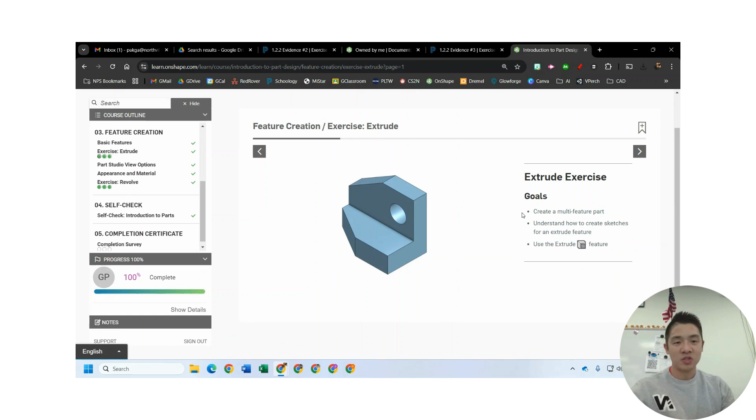All right class, we are now in exercise number 3, exercise submission extrude. We're going to do some extruding today, which is essentially adding a third dimension to a sketch. Here's the instructions, I'll walk you through it and get you going. We're going to create this part right here, starting with a couple sketches. Let's go and get going.

Go to cad.onshape.com, you can type it in. If you haven't bookmarked it, I'd highly recommend a bookmark. We'll create a new document. This is the extrude exercise, and for me I'll keep track that this is my video tutorial version. Hit create, take you back over here.

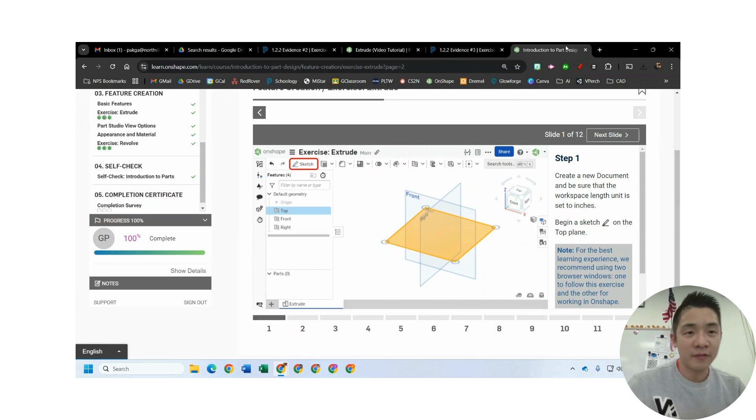First thing, I'm going to have those instructions up as we go. We're going to create a new document, make sure workspace unit is inches. Again, you can double check that in the 3 bars, come over to workspace units, and inches is good.

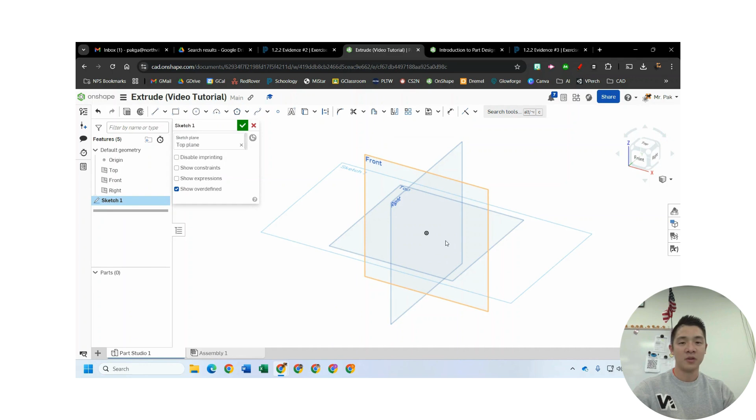Next up, we are sketching on the top plane. Come over here, hit sketch. You can choose it from this list over here on the side, or choose it straight from the main view. I would look at it normal to the view, meaning straight on. You can click on the view cube up here or hit the letter N. I chose the letter N.

Next up, and we got 12 steps here total: coincident to the origin, so we're going to start a corner rectangle, making sure that it starts on the origin and goes to the bottom to the left. Corner rectangle up that way, click here, drag it down. Looking good.

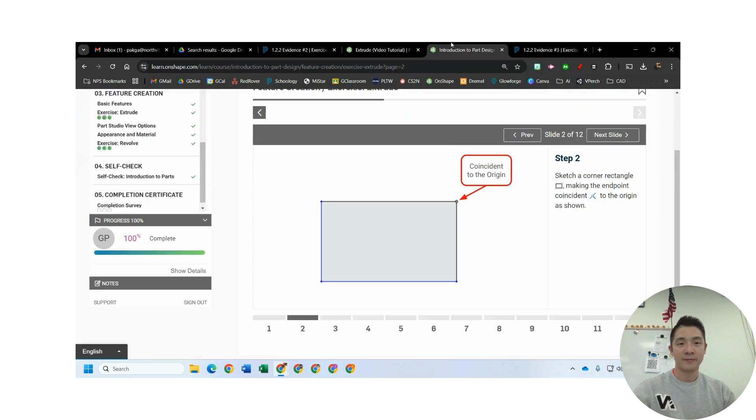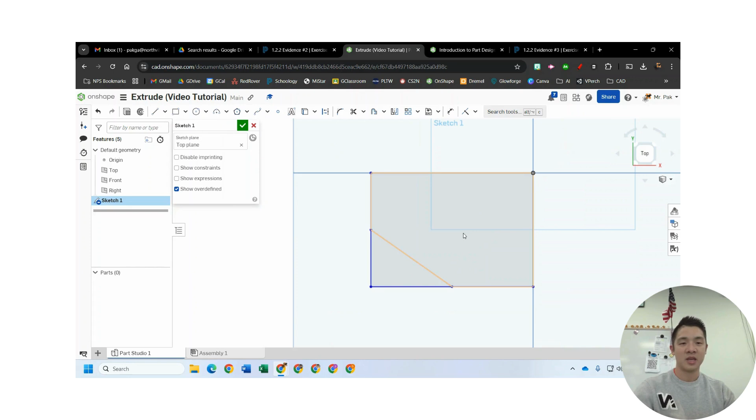All right, next up we're going to sketch a line. Want to make sure the midpoints are shown there. Come over this way, hit line or the letter L. Notice as I hover over a line, if I go towards the middle, it'll give me a little box, that means it's the midpoint. I click, do the same thing over here, find the middle—oh there it goes. Click and hit escape to end the tool. Now I've got those locked in.

Step 4, add some dimensions. It's 5 by 3. I'll go ahead and hit the letter D for dimension. This side's going to be 5 inches, I type 5 and enter. This side's going to be 3, enter. Everything's black, it's constrained—that's what I want it to look like.

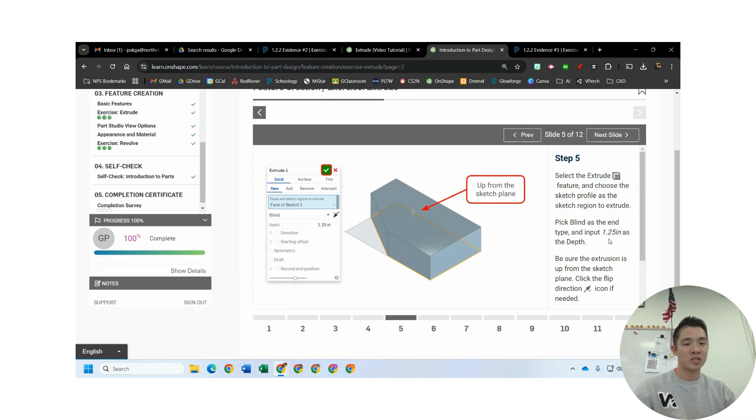Let's keep it going. Step 5, I'm doing extrude. It says in this case, choose extrude. The profile is going to be this little box with the slanted edge cut off. It's going to be a blind extrude, and it's going to be 1.25 inches in depth. Click the arrow if you want to flip the direction.

All right, so here we go. Check mark the sketch, come over here to extrude or shift E. I'm going to choose this profile, and sometimes I'll move the view cube. If you also want to get in the habit, you can zoom in or out, right click so you can rotate. That's a nice way to view your object and see what it's doing.

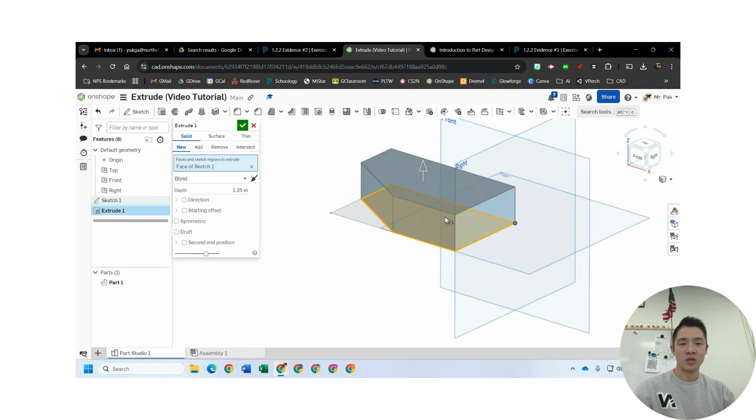So in this case right now, it's extruding by 1 inch. I want that to be 1.25. It's going to be a blind extrusion. And if I wanted to, I can have it flip the opposite direction, but what it was doing was looking good. Hit the check mark.

Okay, let's see what's next. Slide 6: select the back face to sketch on. I'm going to come over here, hit sketch, rotate around to the back of my part, and choose that face.

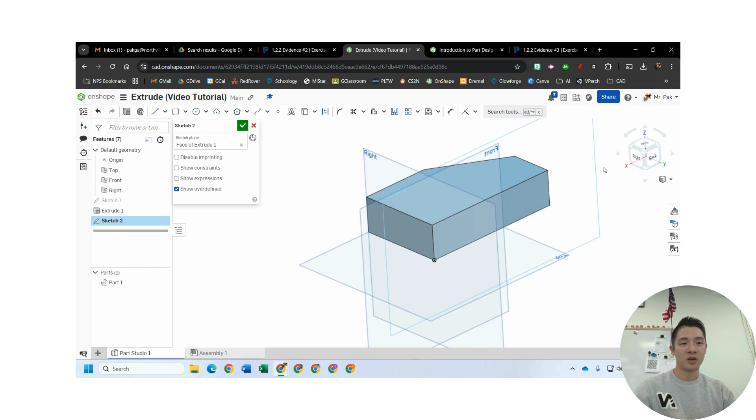The tricky part to this one is in this view, we're actually looking at the back of the part. So I'm going to rotate this back around to the front, and that's how I see that this part has a slanted portion compared to the flat portion of the front.

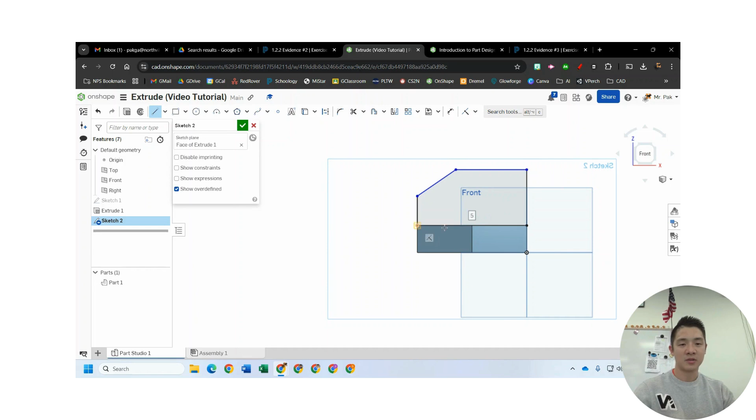I'm going to create this little sketch profile. Just grab a couple lines here, start off in this corner, do something like this. I'm going to make sure I don't lock things I don't want to. In this case, I'll create one more line just to close it off. Hit escape to get out of the tool.

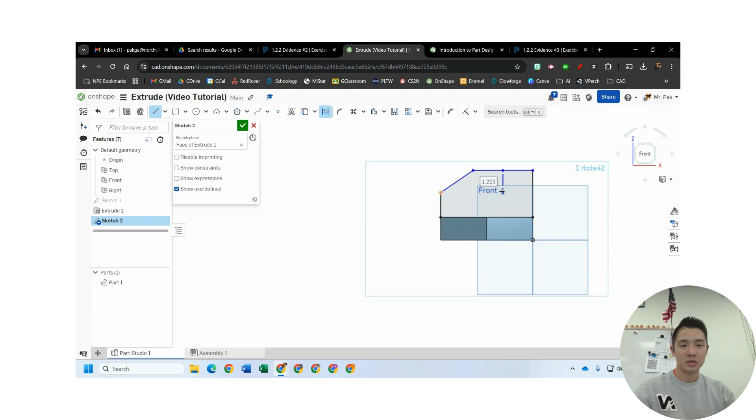Let's see what's next. We're going to do a couple construction lines with a circle. We want to make sure the midpoint is on this top line. So, line, I want it to be a construction line. Hover over the middle, click down, and make sure this lines up as well. There we go. Then one more construction line here, make this come across like that. Hit escape to get out of it.

The last one is a circle, center point circle, where those two lines meet. I'm just going to generally draw the shape for now. We'll add size to it next.

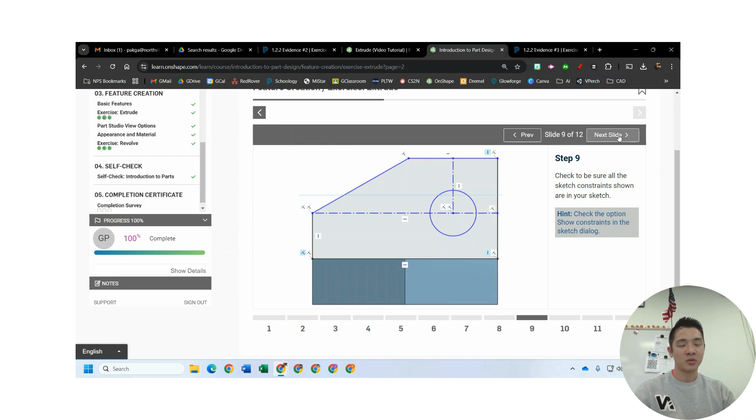Next slide. All right, check to make sure all those constraints are in place. That's vertical, that's coincident—I checked that earlier, so we should be all set. Next step, a couple dimensions: 2.5 to that middle construction line, 4 above here.

Hit the letter D or click there to make dimensions. Here to here is 2.5. Top to the bottom is 4. Hit, click, and enter. This is 1.25, it's an angle of 30. This is 1.25, hit enter. Click here, the diagonal compared to this line—this is what's 30.

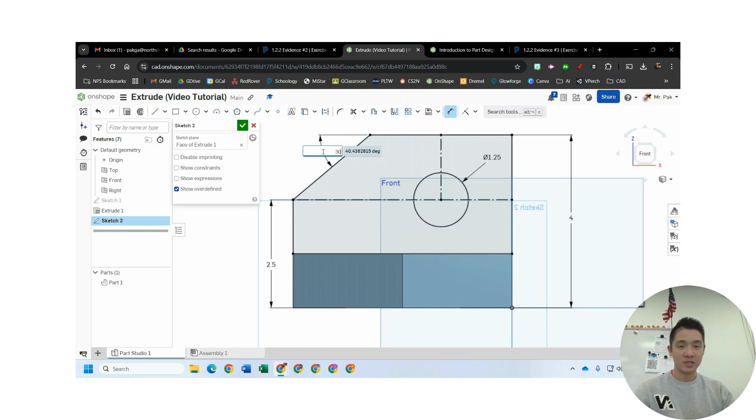Everything is black, it's all constrained. We are looking good. Next slide.

We're going to extrude this out to 1 inch in depth. We want to make sure it's add, so it's going to combine those two parts into one part. Hit the check mark on the sketch, then come over here to extrude.

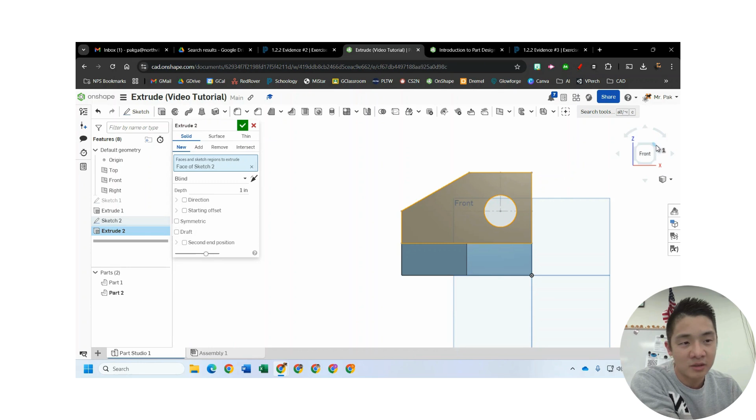Choose my profile face. I'll change the angle just so we can see what's happening—right now it's going the wrong way. I can click on this to flip the direction. 1 inch is correct. Also, I want this to be an add, notice right there, so it becomes all one part. And if it didn't already, you click merge scope, making sure it's merging to the part that you want. All right, hit the check mark.

This is kind of where we are currently at. Double check what we have to do next.

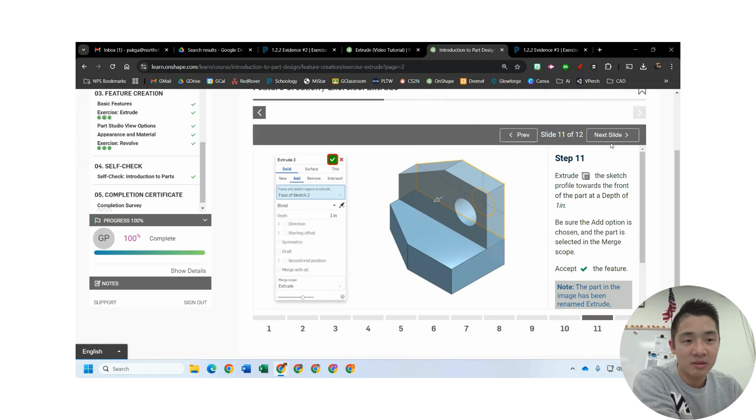We'll check the volume, so we're going to click on mass properties to check the volume. The way we do that is in the bottom right hand corner, display mass section properties. We do have to have the part selected, so I'll choose it from the part list over here. Mass properties, let's see what we got. We don't need to define a mass or volume yet for the material, so we're just going to check the volume: 26.981 is what we want.

Once we're there, take a screenshot, make sure you include your name in the top right hand corner. You're all set.